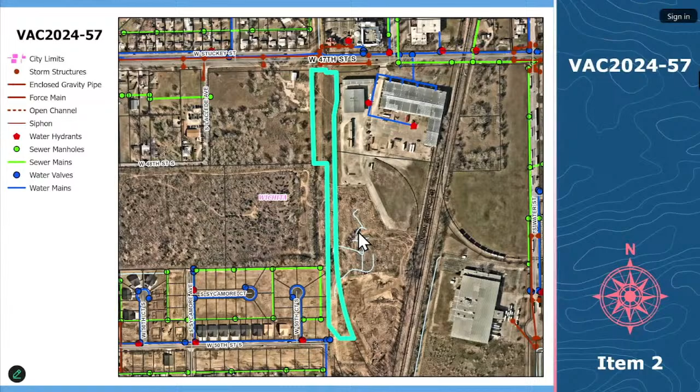So I'm not clear on what happens with the bike path then. I don't know if the photo's still up - bike path going north of 47th would still be the same. As she picks up that, we would hope to see it come over here to Seneca and be an on-street bike path just for that half block to get back up - this is kind of our thoughts and recommendation on an alternative path based off of what we're wanting to do development wise. And that would still offer Haysville an opportunity to get up and back into, I think that was the mayor's letter, a nice path to get from Haysville all the way up into downtown Wichita.

Is that blue dotted line an existing bike path right now? That blue indicates a road. I'm gonna let you answer that, Scott, because I'm gonna sound like I don't know what I'm talking about. More so than I already did. I can speak to this map, and then I will defer to Lee, who worked on the new map. What it shows is an on-street facility, and I think that blue color is for bike lanes, but they do not exist. It's proposed. Yes, that's true. It's proposed, not there yet.

Okay, other questions? Thank you. Is there anyone from the public who would like to speak on this? All right, I'll bring it back to the commission.

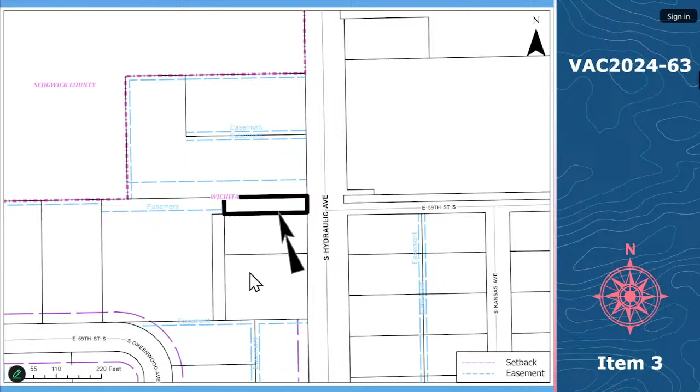This part of East 59th Street South right-of-way was only part of the subdivision. It's a very small subdivision, the Mar addition, and so all rights of reversion go to the property owner to the south. If you go to the aerial map, please.

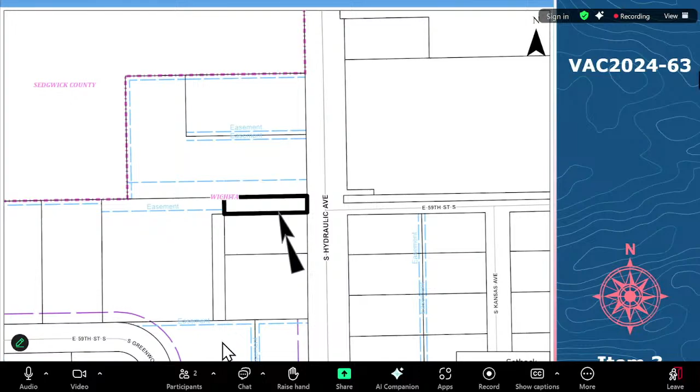In 1965 the Mar addition was platted, and it dead-ended into unplatted property to the west. Then in 1978, the L.R. Stevens addition was platted, and that includes these properties down here.

At that time you can see how Greenwood comes up from 60th Street, curves in, and becomes East 59th Street South. That right-of-way was dedicated in 1978 and these properties have access off of East 59th Street South. So there became no viable reason to have 59th Street continue to the west, because it actually was established farther south.

So this property, though it abuts the dead end of the right-of-way in question, is not deprived of any access because it has its driveway and access off of East 59th Street South.

This property was platted in a different subdivision and does not have any rights of reversion. The subject right-of-way was platted in the Mar addition, so all rights of reversion only go to the property owner to the south. This area, I don't believe is platted, or if it is, it didn't dedicate any of the right-of-way, so they don't have any rights to that portion.

So suffice to say, no property would be deprived of access. There's no need to keep it there anymore because East 59th Street exists somewhere else. There are no public utilities there. There's a storm sewer inlet within the south right-of-way for hydraulic, but it will not be affected because the vacation comes to the hydraulic right-of-way line and does not extend past that. So we're not losing any right-of-way where that storm sewer inlet is.

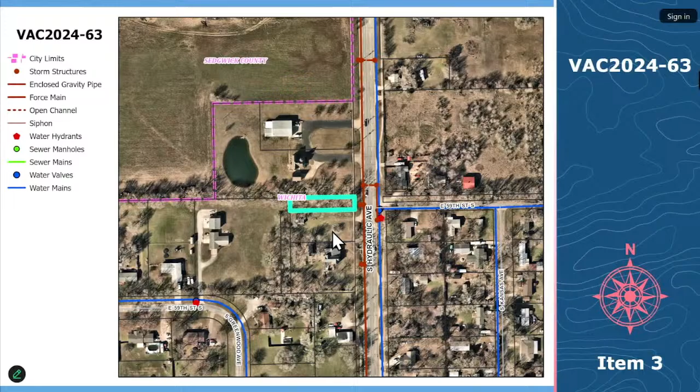All right, questions for staff from the commissioners? From the advisory board members? Thank you, Phil. Evergy has no additional comment for the record.

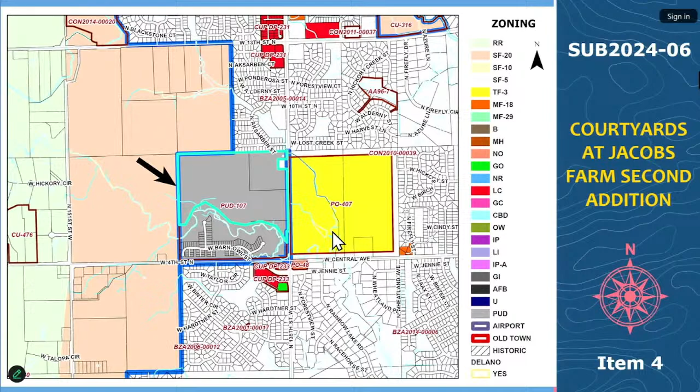And then the next screen. This is the final layout. As you see in front of you on the screen, complete access controls are indicated along North 135th Street West with 270-foot full movement openings.

There are quite a bit of waivers that will need to be obtained. The first waiver is for depth to lot width ratio for all lots in blocks 1, 4, 5, 7, and 8, and lots 57 through 105, block 6. These lots are 2.5 times the width of the lot. There may be some couple lots in between those blocks that meet the requirement, but just so I don't miss anything, I'm just requesting a waiver for all the lots to waive that requirement.

Waiver number 2 is a waiver to allow for platted streets with dead ends. Subdivision regulations state cul-de-sacs shall be provided with a circular turnaround with a turning diameter of at least 70 feet and a street property line diameter of at least 100 feet. The proposed windbreak courts, included along the north line of the northeast corner of the subdivision, do not have the cul-de-sacs. This approval of this waiver will be contingent upon City of Wichita Fire Department's approval, just because of emergency access issues.

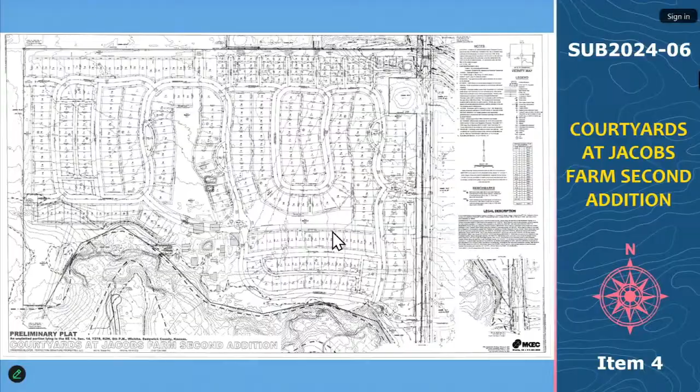Okay, questions from the commissioners? Advisory board comments? Randy with Evergy, no additional comment.

Matt Schultz, City Engineering. In discussions with MKEC concerning lots 8 through 55, Block 6, the northeast lots, we have been talking about how to get sanitary sewer to these. We are looking at installing sewer in the rear of the lots, which would require 20-foot rear lot easements, and then also a 25-foot easement. Normally we would request just 20-foot for sanitary sewer, but we've also requested water to be looped through that reserve, which sanitary sewer and water would require a 25-foot easement.

Lee Carmichael, Traffic Engineering: the streetlight placement has been approved, so. Okay.

Chief O'Katy, Wichita Fire. I'm aware that the agent, along with the fire marshal, have been in discussion. I would like to request a set of plans with the revised agreements to make sure that the agreements are per conversation.

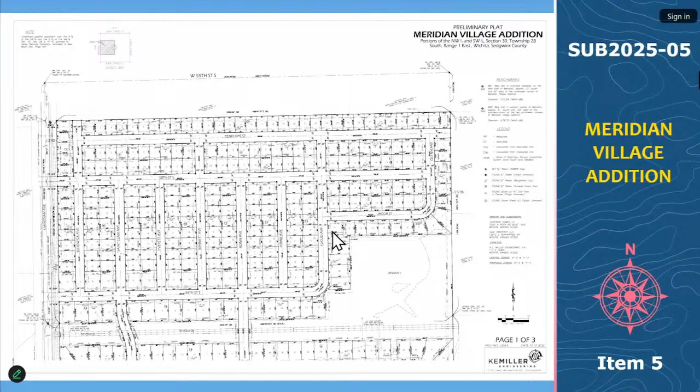Questions from the commissioner? Advisory board? Evergy transmission engineering also wanted to pass on a reminder that any site plans, including but not limited to final grading, landscaping plans, and road and street lighting plans, be forwarded to them, since this runs right through the middle of it. Our easement is right there with our poles, and they just want to make sure nothing is put in the easement.

Thank you. Other comments? Okay, we'll call on the agent. You have 10 minutes. Name and address, please. Kirk Miller, K.E. Miller Engineering, 117 East Lewis. We're fine with all the staff comments.

One of the questions had to do with sanitary sewer. We're going to end up having to put a lift station in; it'll be at the south end of the property. I've met with Sean a couple times on this, and we'll get everything finalized.

We will be extending water up Meridian Street that'll feed this property. The property to the north is in the planning stages right now; I've met with them and we'll end up moving this over to tie in with them, so those all loop together. I'd be glad to answer any questions.

Okay, any questions for the agent? Okay, thank you. Anyone from the public wish to speak on this? Seeing none, bring it back to the commission.

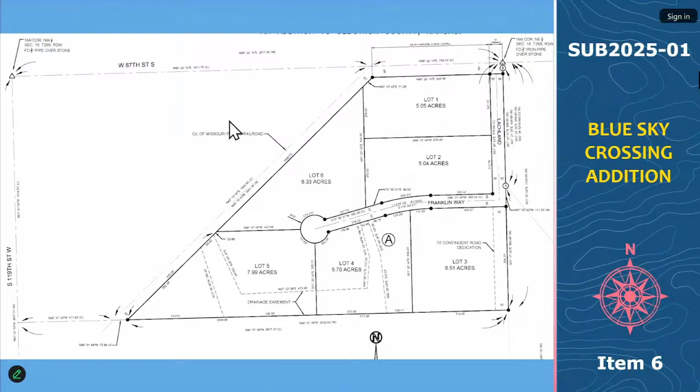With that, I will stand for questions. On the drainage plan, has it been approved now? Yes, the drainage plan has been approved. Other questions for the staff?

Comments from the advisory board? Okay, thank you. Call on the applicant or agent. You'll have 10 minutes, and please state your name and address.

Good morning, Logan Mills with Certified Engineering Design, 1935 West Maple. We're in agreement with staff comments, and I'll stand for any questions.

Okay. Questions from the commissioners? Thank you. Bring it back to the commission. Anybody else want to speak on that? Oh, I'm sorry. You're good at that. Is there anyone from the public that would like to speak? I'm sorry. Okay.

You will have 3 minutes to speak, and please state your name and address. Donna Tibbetts, 7620 South Ridge Road. I am the clerk of Ohio Township, and we are concerned about the people who buy these lots, what kind of culverts they plan on putting in.

They should contact the township, not their developer. So that was our main question about it. And I have a personal question about it: with all these waterways going through, where will these people put their lagoons? That's all.

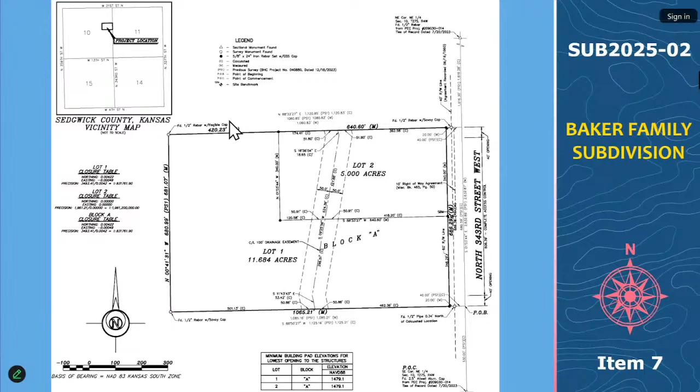Good morning, Greg Sharon, planning staff, here to present the Baker family subdivision. This is a 2-lot residential subdivision in the county. Next screen, please. And next screen, please. Access to the site will be provided along North 343rd Street West with one 40-foot opening per lot. There will be one waiver requested, and that is lot depth to width ratio for proposed lot 1.

Going through staff comments: MABCD notes that soil work has been completed and a memo is ready. Item B, county stormwater management - I have gotten word that the drainage plan has been approved. Item C, county fire service drive will need to comply with service drive code and fire code amendments. Item D, county public works states access controls are approved and approves of the proposed right-of-way dedications.

Item E, I did receive a revised plat and all of planning comments have been approved. Item F, county surveying has no comments at this time. Item G, Evergy - the plat is not served by Evergy Distribution; transmission is near the area but has no conflict. Item H, Sedgwick County Electric Co-op will need to request an additional easement at this time; that's been forwarded to the agent. And item I, Phillips 66, should not have conflict, but does have a system run on the east side of 343rd Street, so any utilities that would feed from that side could be a conflict.

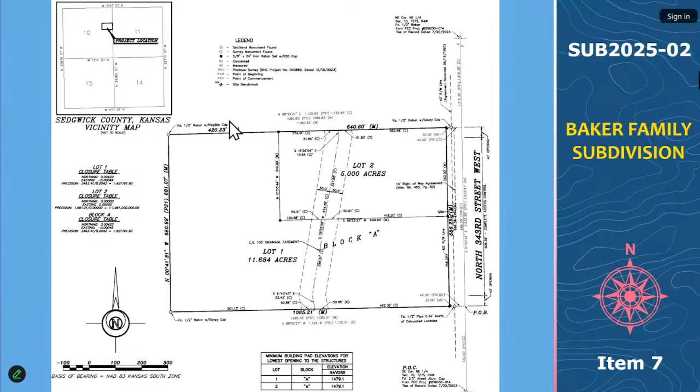So with that, I will stand for questions. Okay. Questions from commissioners? Advisory board members? Nope. Okay, thank you. Call on the agent or applicant.

You will have 10 minutes and we need your name and address. Good morning, I'm Bill Fox with Garber Surveying Service. We're the surveyor for this plat. The only thing I would say is - could I get your address, please? Sorry, 544 West Douglas, Wichita. We have added a floodway reserve to the plat based on the final drainage plan. Other than that, I have no other comments for you.

Stand for any questions. You agreed with all the rest of the staff comments? Yes, we agree with the rest of the staff comments. Any questions from commissioners? Okay, thank you, sir. Anyone from the public wish to speak on this?

Seeing none, I'll make a motion that we approve per staff comments. Second. Okay, we have a motion by Commissioner Zimbelman, a second by Commissioner Johnson. All in favor, say aye. Aye. Opposed? That will pass 5-0-1, I guess, right?

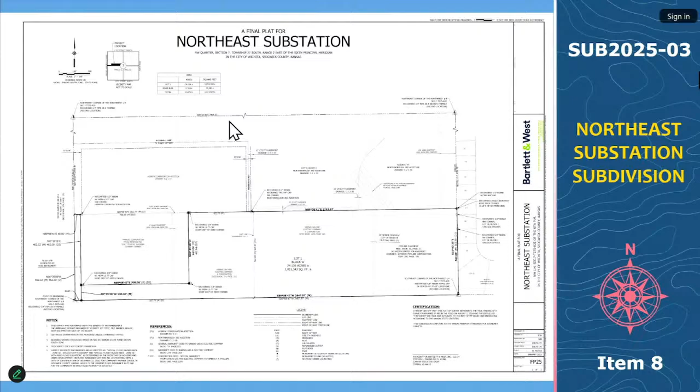Okay, questions from the commissioners and advisory board? Rondi with Evergy, 4025 North Tobin. There's been some misunderstanding between myself and my colleagues in substation engineering. I think they thought I was going to be the agent for the applicant, which I am not qualified to do, and I didn't realize that until today. I'm here, I'm sorry. You're okay.

Apologize for being late. Are you ready for my piece then? Okay, perfect. Are you the applicant? Yes. Agent? Yes. So my name is Jade Lasser, I work for Evergy, I'm the civil engineer, 800 South Kansas Avenue, Topeka, Kansas. As stated, I'm the civil engineer on the project, and we are working to address all of staff's comments. I will say that we have a couple details to follow up with Public Works, traffic engineering, and the county surveyor, just to go through some of those details and find a solution within some internal Evergy pieces and them.

Don't go away, you might have a question here. You might have questions, please, for the applicant or agent? Okay, thank you. Thank you. Is there anyone from the public who would like to speak on this? Seeing none, bring it back to the commission.

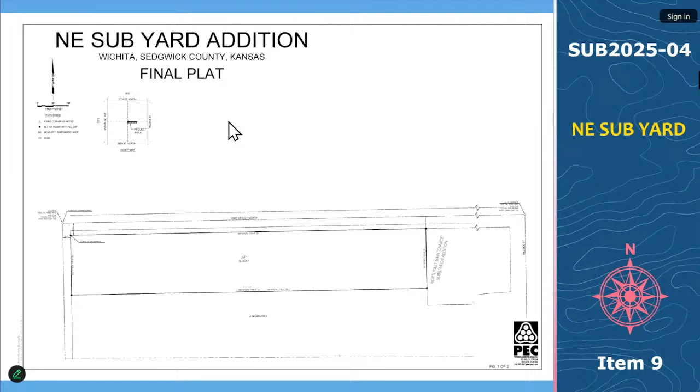And so with that, I will stand for questions. Okay, questions from the commissioners? Advisory board? Rondi with Evergy, no additional comment. Okay, all right, thank you.

The applicant or agent, you have 10 minutes. Good morning, Rebecca Melius, PEC, 303 South Topeka, agent for the applicant. We're in agreement with staff comment.

I will just share that the city of Wichita, who's requesting this plat, is working with City of Wichita Public Works on the details of the limits of the extent of the water and sewer, but we'll get that all squared away here really quickly. So no objection to that.

And then we've not received the Evergy markups, but we'll work with staff to get those incorporated. So we'll be good. Thank you, Rondi. Otherwise, I'm happy to answer any questions.

Okay, questions for the agent? Okay, thank you. Thank you. Anyone from the public wish to speak on this? Seeing none?

Bring it back to the commissioners. Mr. Chair, I'd like to make a motion to approve per staff comment. I'll second. Okay, thank you. Motion by Commissioner Klontz, second by Commissioner Mader.

All in favor, say aye. Aye. Opposed? 5 to 0, 1 again.

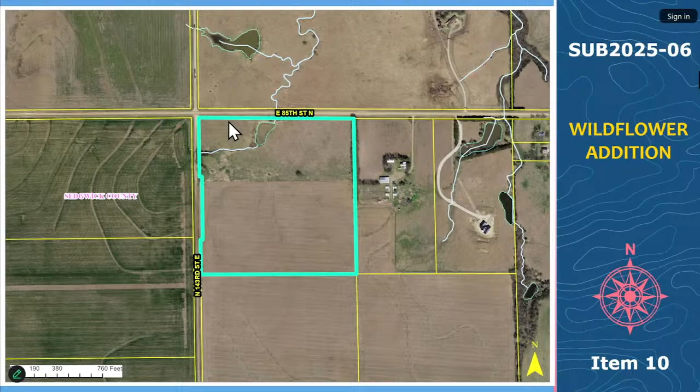Good morning, Greg Sharon, planning staff here to present Wildflower Addition located on southeast corner of 143rd and 85th Street. Next screen, please. This is a one-step plat for a 6-lot residential subdivision in the county.

Next screen, please. The plat shows complete access controls along East 85th Street North and North 143rd Street East, with 3 openings along East 85th Street North and 4 openings along 143rd Street East. There are no waivers requested by the applicant owner.

Going through staff comments, Item A, MABCD, this is in Butler County Rural Water District Number 5. If eligible and feasible, recommended connection. Soils work needs to be completed before approval memo is issued.

Item B, stormwater management has approved the drainage plan unless access control drive entrance locations change during the planning process. Also note that lots 1 and 2, Block A, shall have minimum pad elevation table on the face of plat and noted in platter's text.

Item C, county fire comment regarding compliance with service drive code.

Item D, County Public Works request right of way at the section line road intersection be revised to provide the width as required per subdivision regulations. Request access controls meeting county standard. Recommend lots 2 and 3 share an access, lots 1 and 4, and lots 5 and 6 share an access opening.

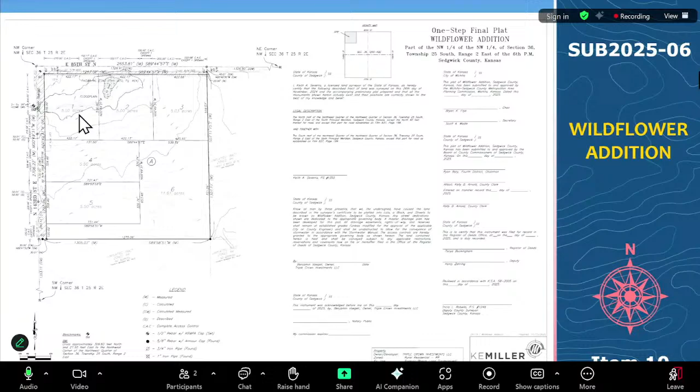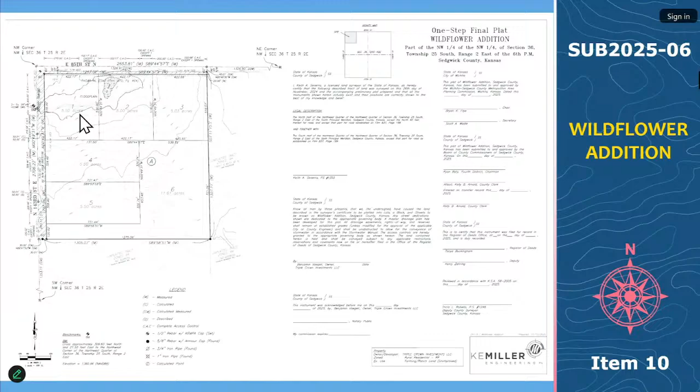Okay, thank you, any further comments? I had mentioned either that opening or that opening for lot 1, and if there was a way to put a note on the plat that depending on how it develops, they could only have one of those openings. I don't know if staff can answer if that's something we can do, so that we'd only have one access to lot 1. I've never seen it put on a plat that way, but there might be some wording we could work out. It could probably have some unique text to ensure only one can be used.

Okay, I have a question. Have you gotten into this far enough to know if they're going to be able to hook onto the rural water district? I don't know that answer. That's something the owner's going to have to deal with them on. You know the problem we've been having with wells everywhere, so yeah, it would be nice if you could hook onto the water district.

Any other comments? Kirk Sponsel, Deputy County Counselor. Just for some clarification and discussion on the process here, we currently have the application listed as no modification waivers were requested. However, based on the comments of County Public Works here today during the discussion, it sounds like a modification waiver would be required.

Just from what I'm hearing, it sounds like some things are still being decided, still being assembled. As part of the subdivision regs, a request for modification of design criteria shall be made to the planning department, which shall then transmit the request to the planning commission. So if we're discussing a modification that isn't even solidified yet, it may be more appropriate if a deferral were made on this item. But I'd defer a little to the applicant on how they want to proceed. I see Public Works looking at me as well.